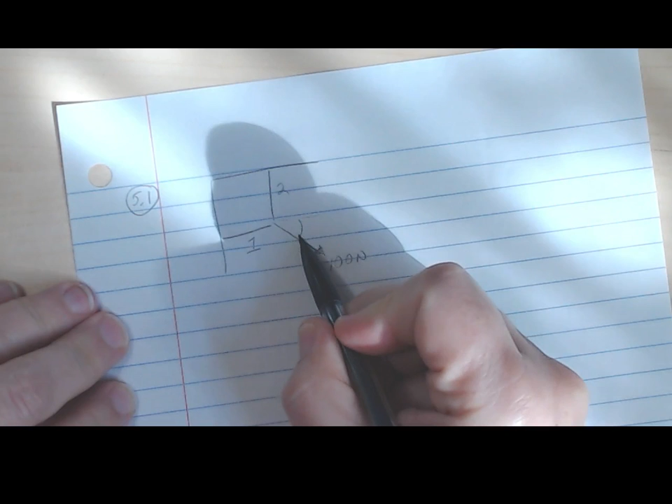Okay, next time I should not be recording these when it's so bright and sunny outside.

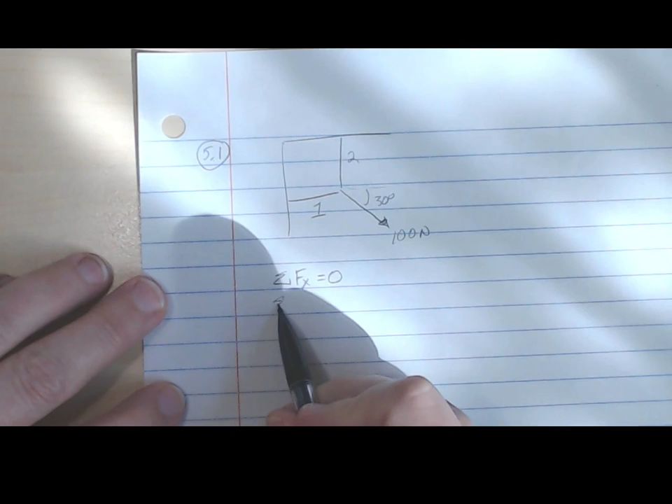Okay, the key thing you've been learning in these sections is that when you have no motion, then you know the sum of all the forces in the x direction are going to equal 0, and you know that the sum of all the forces in the y direction are going to equal 0. If there's no motion, there's no net force. Later, in a later chapter, you learn that if you have motion, the summation of the forces in the x is going to equal mass times the acceleration in the x direction. But for this one, we have no motion, so we have no acceleration.

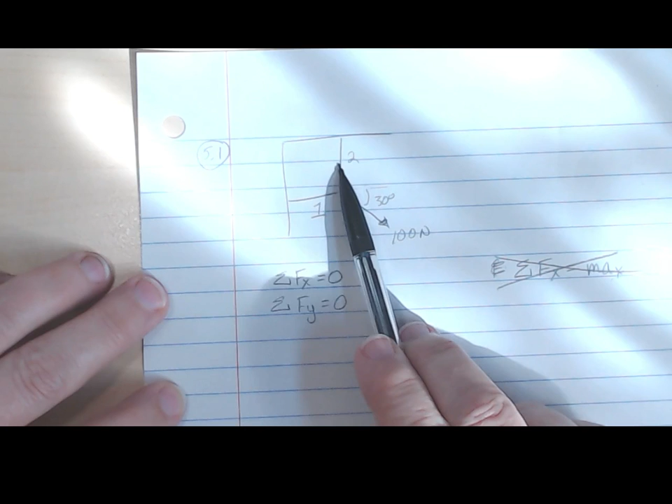So it's pretty easy actually. You can tell that obviously the x component on this force is going to equal 1 and the y component on this one is going to equal 2. But let's write it out just to show you the method. So I'm going to start by summing the forces in the x direction.

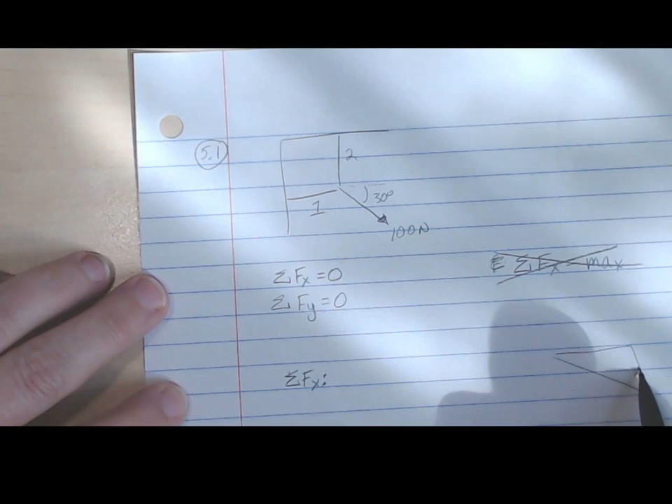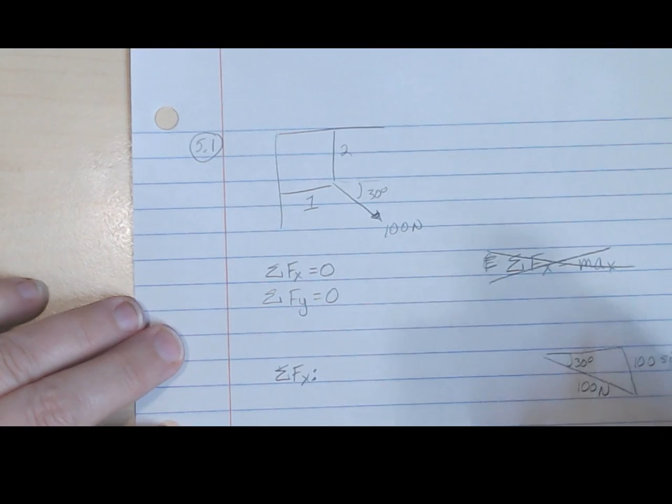Okay, let's come over here. I'm going to draw this little triangle. If this is my 100 Newton force right here, this is 30 degrees. What is the vertical and what is the horizontal component? If you recall, it'll be 100. It's across, so it'll be sine of 30, and this will be 100 cosine of 30. Okay? So sum of the forces in the x direction, be sure to watch your signs. To the right is positive.

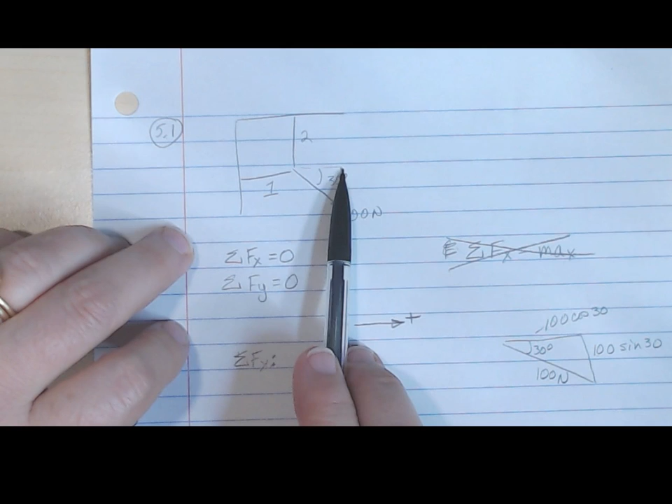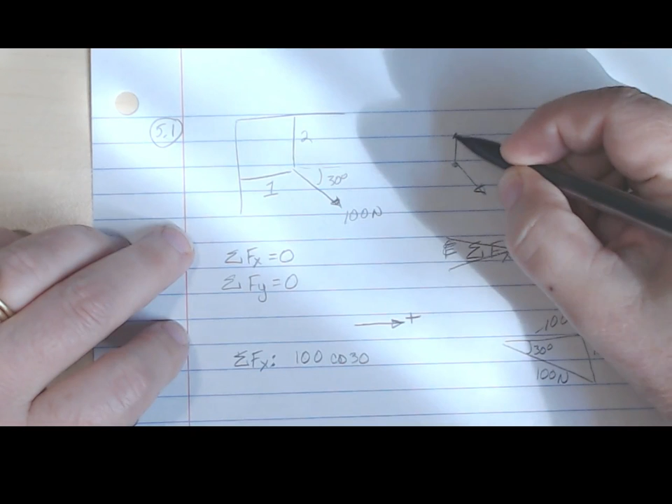So let's look at all the forces we have. I'm going to have the component of this one. It's pointing to the right, so it'll be positive. So it'll be 100 cosine 30. And what else do I have? If I were to draw the free body diagram on this little point right there, I have T2, T1, and then of course the components on this one.

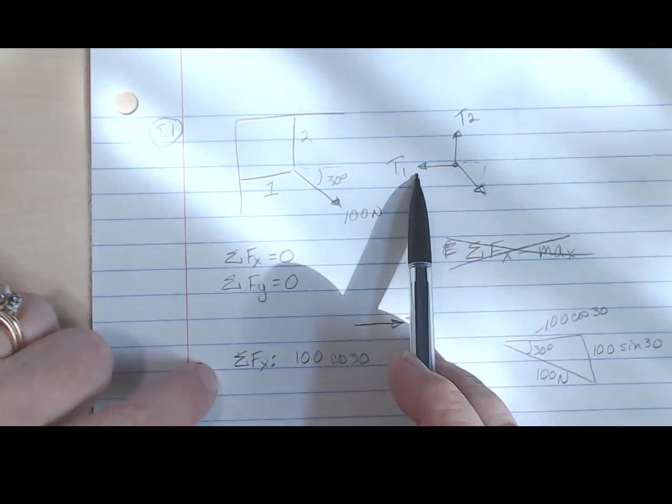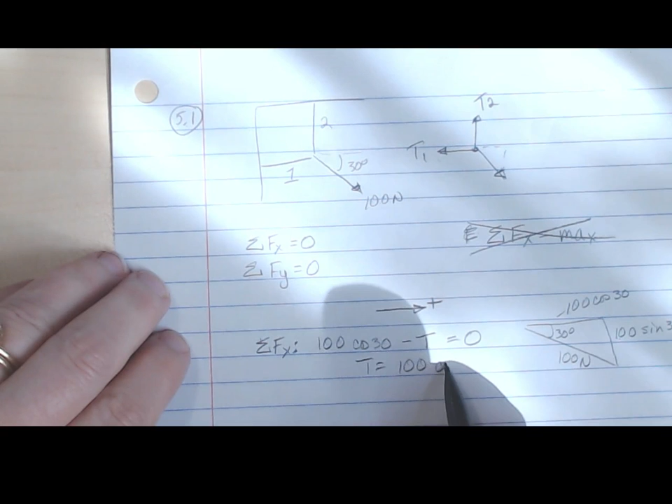So my other force in the x direction is going to be T1. It's pointing to the left, so it'll be negative. There's no motion, so it equals 0. So what does it show you again? The algebra is very simple. T1 equals 100 cosine of 30. Okay, and then you will solve this in a similar way for the y. But this is the way you need to be able to write it out. So let's do the y.

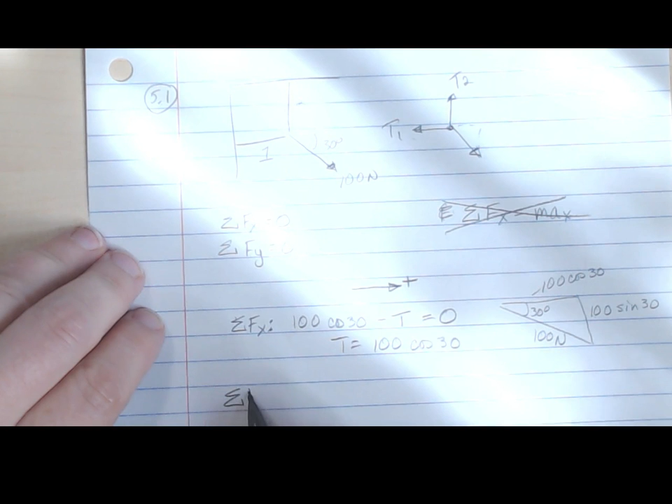So we'd have T2. How's that? Okay, that helps, I think, if I can hold it in the right spot. So we'd have T2 minus the vertical component of this, which is 100 sine of 30, and that one equals 0. And again, simple algebra, you can solve for what T2 is.